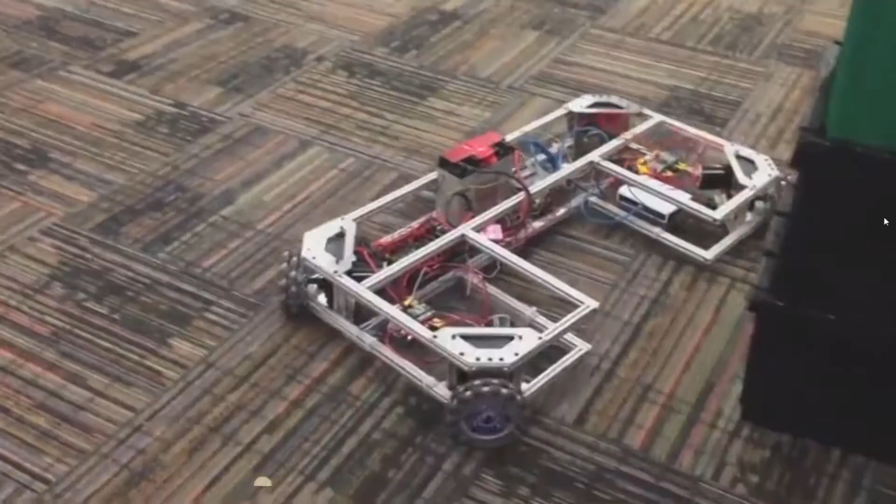If you just joined our series, we are creating this rolling robot chassis. In this episode, we are going to simplify our design by focusing on only one corner of the chassis. We'll put our parts in place and create a subassembly. We can reuse our corner design with our chassis to complete the other three corners.

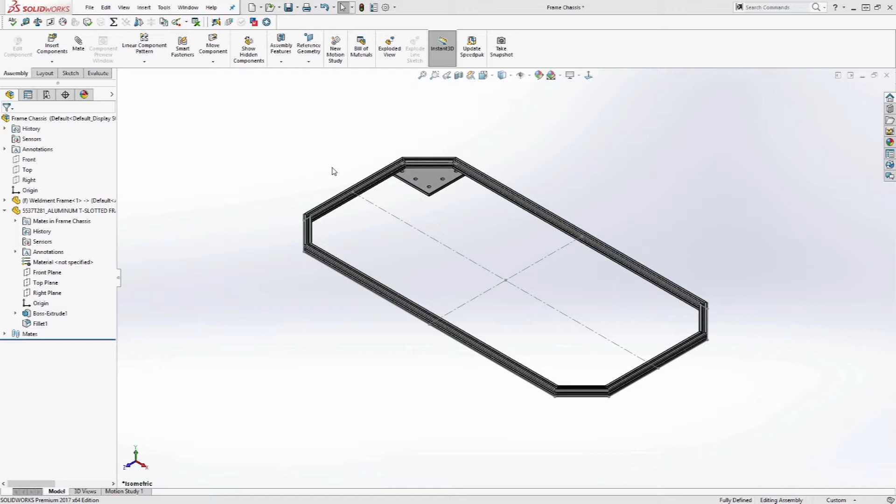Before I'm ready to add mates to align the motor, I need to add a construction line to the corner gusset. I right-click on the corner gusset and select Edit Part. Sketching on the top face of the gusset, I draw a center line that bisects the corner gusset.

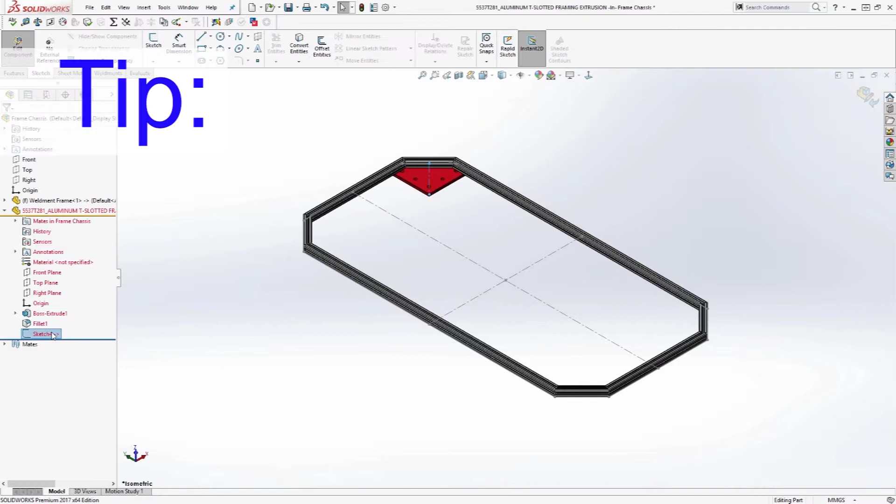I will rename the sketch Axle. Tip: pressing F2 after selecting the sketch enables you to rename it.

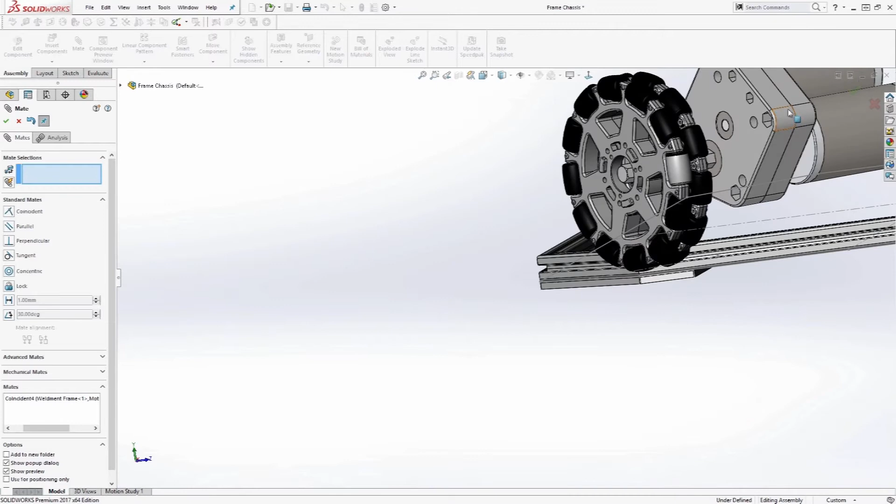I am now ready to insert the motor and wheel part into our assembly. I need to add 3 mates to define our motor position. Using a coincident mate, I align the outer faces. Next, I define a 120 mm distance mate from the top of the corner gusset to the top of the motor. Finally, I add a coincident mate between the motor's right plane and the axle sketch.

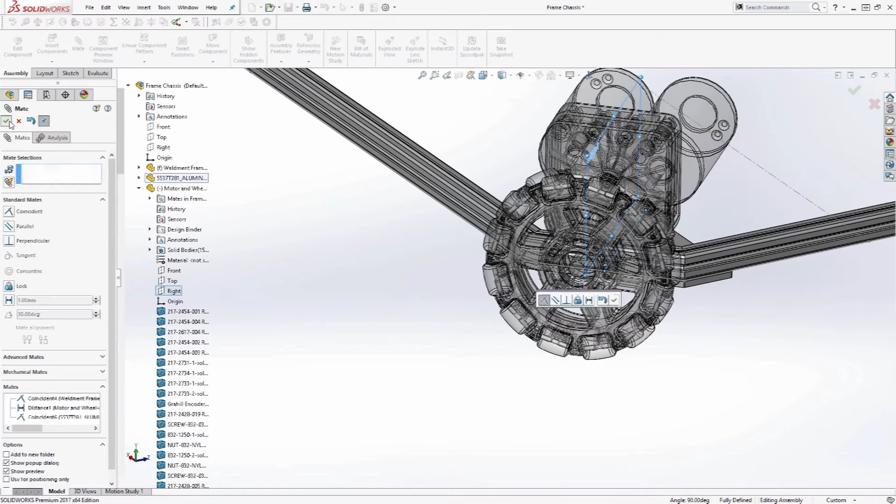Now that our corner is mocked up, I want to create a subassembly. To do this, I select the corner gusset and the motor. Right-click on the part and pick Form New Subassembly. This creates a new virtual assembly.

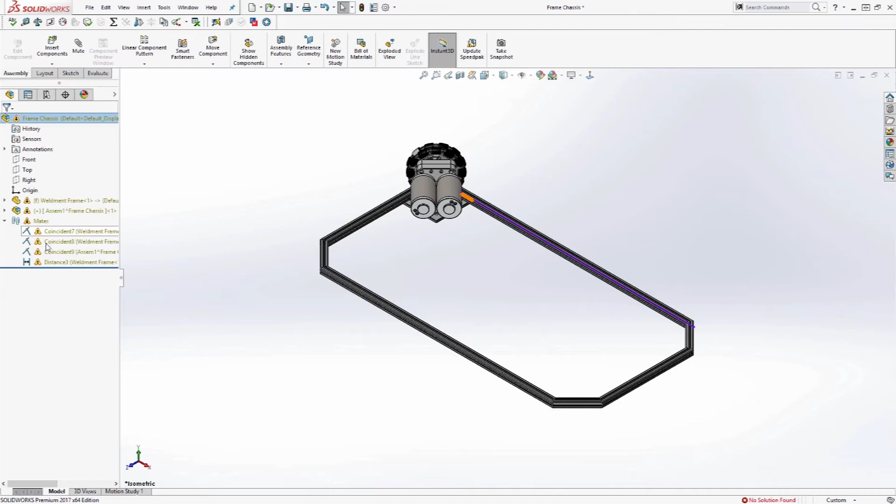Our design is now over-defined. The distance mate we added earlier is now over-defining the assembly. Delete it.

To wrap up the subassembly, I will rename it Motor Corner Sub. Right-click on the Motor Corner Sub and select Save Assembly to an external file, then select Same as Assembly. Click OK. This converts the virtual assembly into an assembly.

Using subassemblies is a great way to distill your design into logical groups. With options to pattern, copy, and mirror these subassemblies, we can reduce our design time.